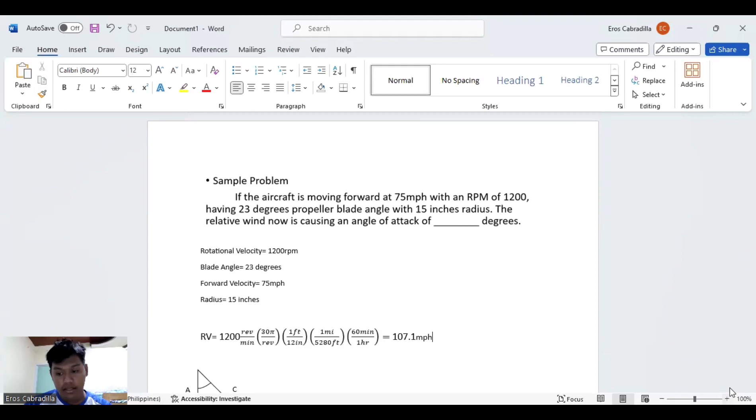So we have 4 givens here, which ano sila? Rotational velocity, kani, equals 1,200 RPM, blade angle 23 degrees, forward velocity, since it is stated in the sample problem that the aircraft is moving forward. So forward velocity equals 75 mph or miles per hour. Then the radius of the propeller or the circle is 15 inches.

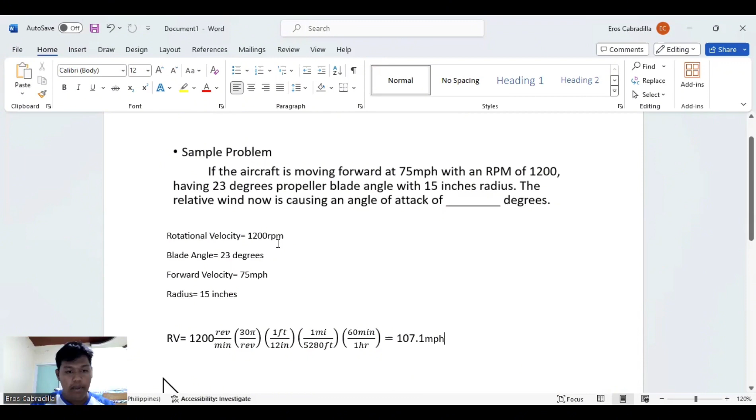So to come up with the angle of attack, we first need a basic conversion. We need to convert this 1,200 RPM, the rotational velocity, since it is in RPM or revolutions per minute, into miles per hour, mph. So here, provided na here ang solution, I will discuss na lang if giunsa. So RV, or rotational velocity, equals 1,200 rev per minute.

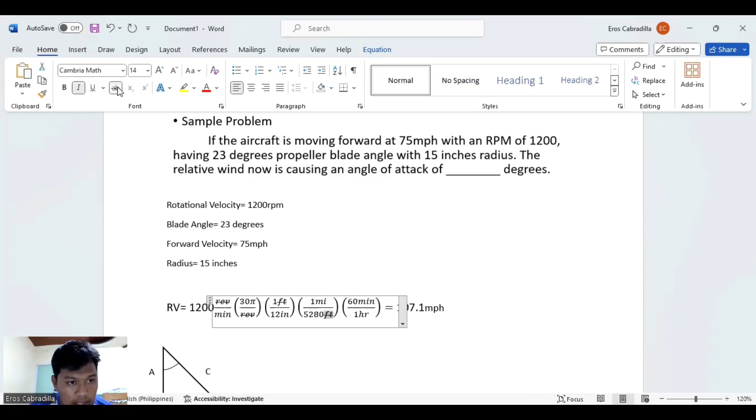So we need to convert minutes to hours. So 1 hour is equal to 60 minutes.

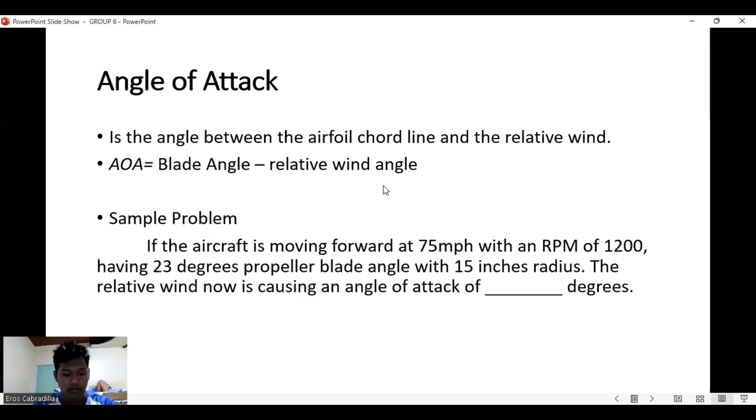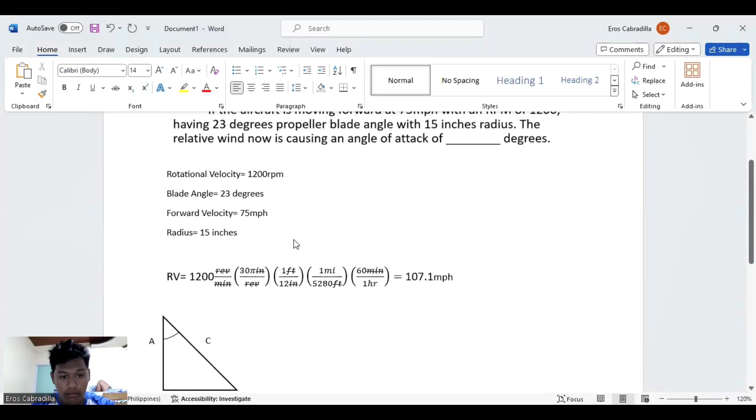So going back to the formula here for angle of attack: blade angle minus relative wind angle. We can subtract now since we already converted our rotational velocity into mph, then got its degrees. So the formula is blade angle minus relative wind angle. Blade angle here is 23 degrees, so it's 23 degrees minus our relative wind angle, which is this one. So basically, 23 degrees minus 0.57 degrees is equals to 22.43 degrees. This is our angle of attack.

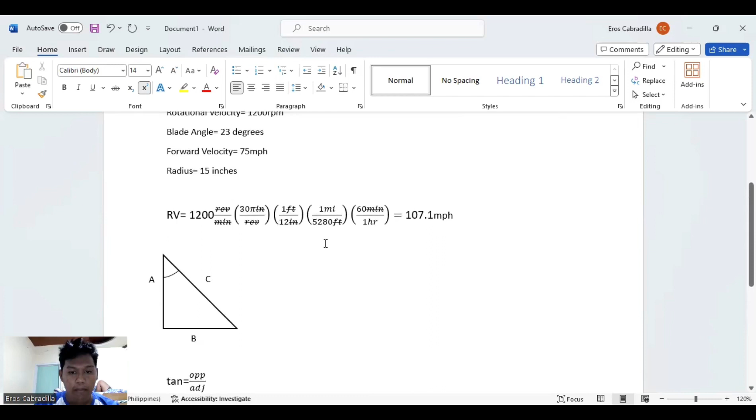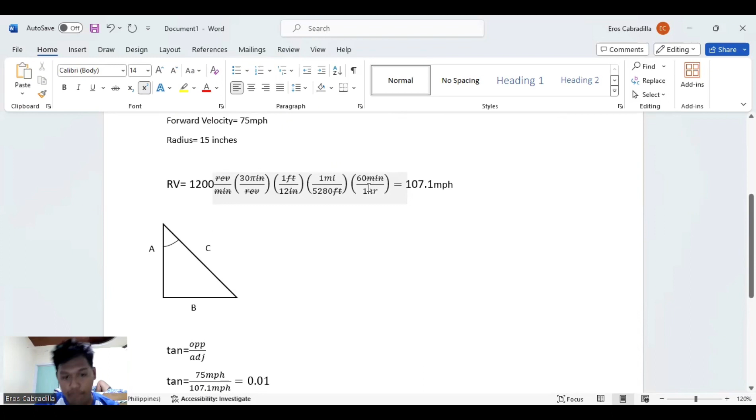It's actually simple, just a long process here with the conversions. But it's a simple conversion, and the given values are given: 1 foot is equals to 12 inches, 1 mile is equals to 5,280 feet. So it's easy to get the angle of attack. That's how you get the angle of attack.

We will proceed to the next topic, which is tip speed, and we'll explain more about tip speed and how to calculate it. Tip speed is basically the speed of rotation at the tip of the propeller. Aircraft propeller tip speed is the speed at which the outermost portion of the propeller blade moves through the air.

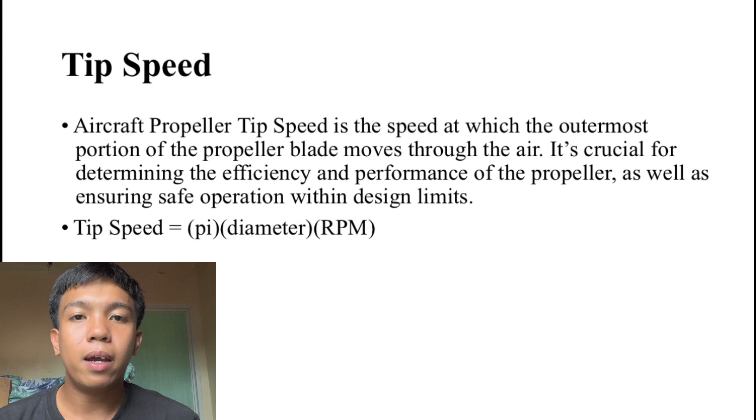For example, the very tip of the propeller, that's called the tip. It's crucial for determining the efficiency and performance of the propeller, as well as ensuring safe operation within design limits. For example, the tip speed is how fast those blades move through the air. It's not just about speed, it's about balance. Too fast and you risk inefficiency and noise. Too slow and you sacrifice thrust. That's why we carefully report propeller tip speed, ensuring our aircraft operate efficiently and safely, powering through the skies with precision and grace. So if you're calculating the tip speed, you need to multiply pi times diameter times RPM.

The last topic would be propeller efficiency, or how important the propeller is in flying an aircraft. I'm here to discuss propeller efficiency, how important the propeller really is to the aircraft. Aircraft propeller efficiency is a measure of how effectively a propeller converts engine power into thrust. It's a crucial aspect of aircraft performance, impacting fuel efficiency, range, and overall operation.

Propeller efficiency is determined by factors such as the design of the propeller blades, the angle of attack or pitch, and the speed at which the propeller rotates. A more efficient propeller will produce more thrust with less power input, resulting in better fuel economy and overall performance for the aircraft. This means high efficiency means the propeller generates more thrust for a given amount of engine power, resulting in better performance and fuel economy for the aircraft.

This means that the more well-constructed the propeller is, the more efficient or effective it is at converting engine power into thrust, so it becomes stronger. By improving propeller efficiency, aircraft can fly farther, faster, and with reduced environmental impact, making it a key focus area in aviation engineering and design.